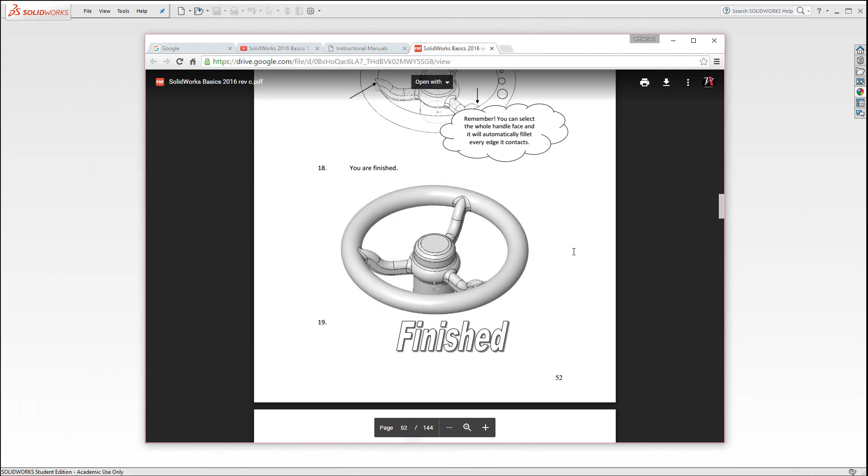This is our goal today, to create this hand wheel that you see, and we're going to step through how to create that. Some of the things we'll learn are new sketching techniques, as well as sweeps and circular patterns.

Start with a new part file. Make sure you're in IPS, for inch pound second, just down below here. Make sure that's set, and let's go to the front plane and start a sketch.

The first thing we want to construct is this block, which is 3 inches by 1 inch. Take the corner rectangle tool, glide up to the origin when it snaps orange, click, drag it out, click again, and add smart dimensions: 3 inches on this side, and on the base, set it to 1 inch.

Go to the center line tool and just draw a vertical center line above that.

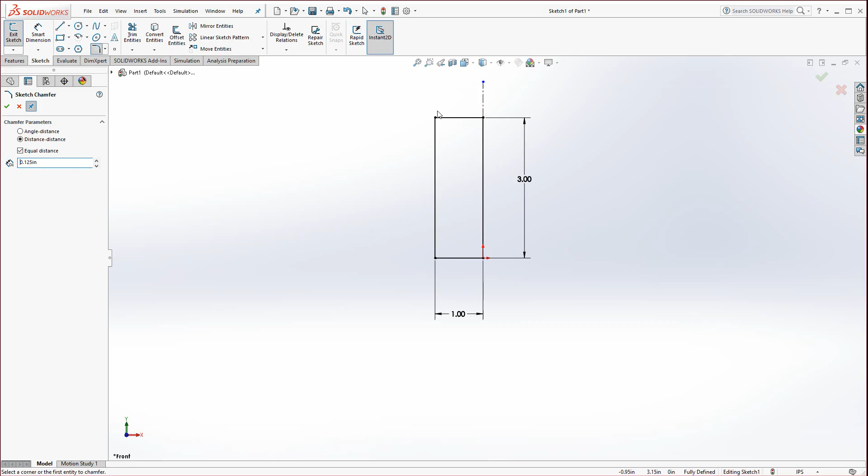Now let's take a look at the sketch chamfer tool. Click on sketch chamfer, and in this case we'll keep it at distance-distance, set it to 0.125, and click on this upper left corner. Hit the green check mark, and you'll see these dimensions up here.

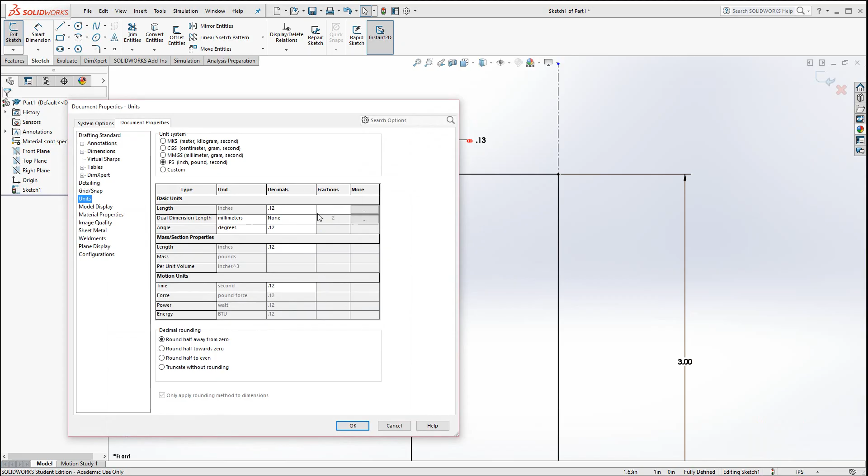Now you'll see a little red chain link, meaning the two are linked—if you change one, the other updates. Notice it's 0.13 because it rounded. So go to IPS, edit document units, and set the length units here to 0.123 to heighten the precision.

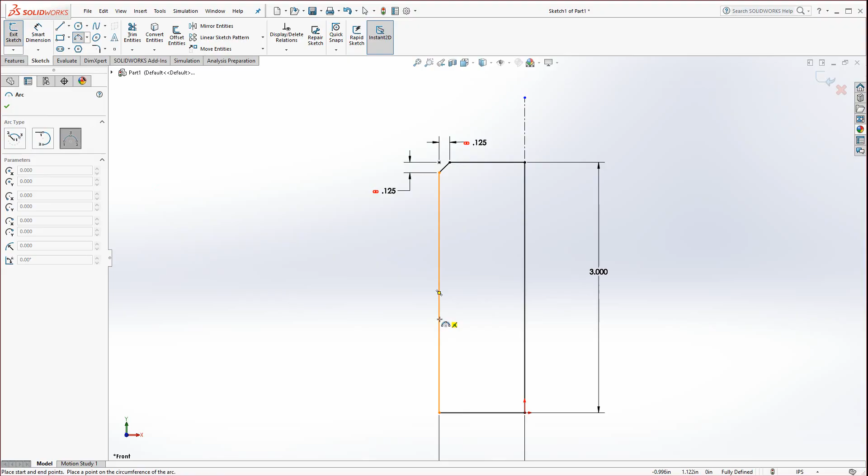The next thing we need to do is add a radius onto here. Click the little arrow to the right of the radius options and go with 3-point arc. Move your pointer up to the edge on the left side of your rectangle, get below the midpoint, about approximately where my pointer is currently, click one time, and release it.

Move your pointer up again past the midpoint, maybe around 1 inch for the length. Click, then move your pointer outward. Be very careful to keep the center point—look for the little blue center point right underneath the radius, 0.623—and keep that to the right of the line. Don't hyper-expand this or it won't collapse back in, so keep it below that, maybe make the radius around 0.6-ish.

Click, and now let's go to Smart Dimension and add a dimension to that. The dimension for that is 1/2 inch.

Now we need to also add some dimensions to locate the center of it. In this case, it's going to be 1.75 off the base, and the center point position involves a 2.5 diameter. So let's first position it off the base: click on the arc, click on the bottom line, drag this out, 1.75.

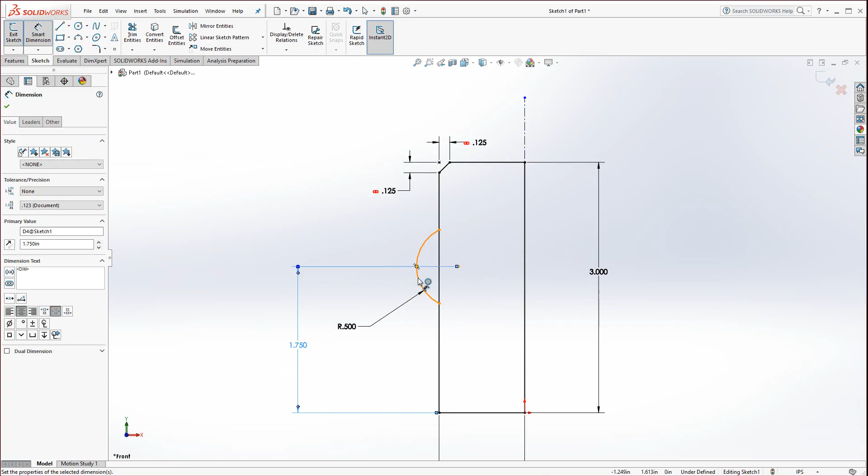Now go ahead and click on the arc, and then click on the center line that's peeking out. If you don't click on the center line, and instead click on the object line below it, you won't get this next option. Click, drag it to the right, and you'll see it gives you the diameter dimension, which we saw in exercise 2. Go ahead and click on that, and just hit the green check mark—notice it's dimensioning to the center, so whatever the dimension is, it's not what we want.

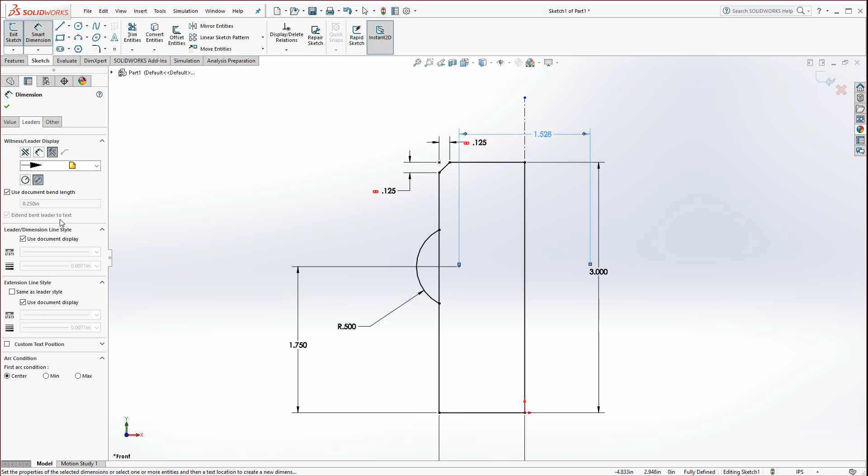So instead, go to leaders, and you'll see arc condition, first arc condition, and we want maximum. It takes it all the way around, looking at the maximum extent of that arc on both sides.

Now there's another way—usually you could click on these points and drag them out. That sometimes works, but this way is usually the best way I've found. If you don't get the arc condition or first arc condition options on the leaders tab, you probably dimensioned to the center point of the arc versus the actual arc itself. Just delete the dimension if that occurs, and retry dimensioning from the arc to the center line.

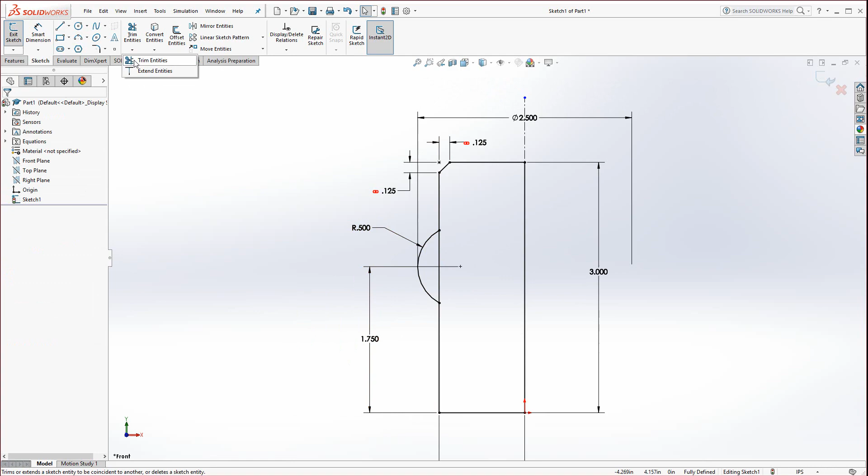Let's reposition these, and now we just need to trim this out. Make sure you go to trim entities, click on it. Notice if you hit the little arrow, there's trim and extend. Believe it or not, the trim entities does both. In this case, we're going to use trim to closest. Get your pointer on that line in between the arc, click, and it will remove it. Hit the green check mark.

Now you're free to revolve this. Let's go to Features, Revolved Boss/Base, and it should pick up on the center line without us having to select it. As long as there's one center line, it just grabs it automatically. Let it go 360 degrees around.

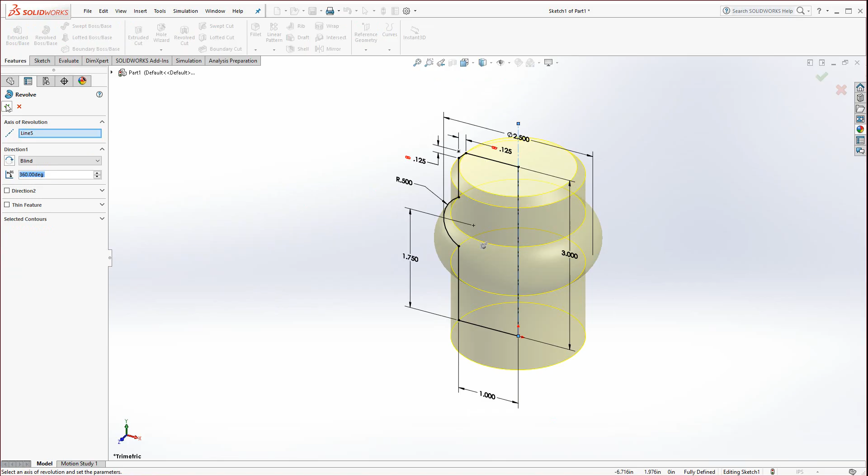Now we could go ahead and select the front plane again and start a sketch, because what we're going to do next - hit your space bar, go to front, zoom out with your scroll a little bit, and if you want, hold Control and your middle mouse button to pan to the right. We're going to construct one of the spokes.

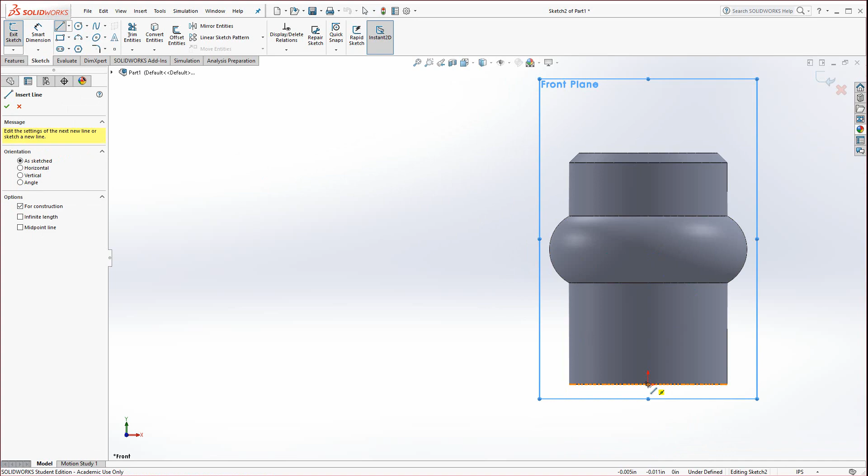So we're going to make, you might say, the skeleton of the spoke using curve. We'll go to the line and align yourself - actually, go to center line first, and click on that origin at the base because it's the center of the model. Make sure you draw a vertical center line.

Hit Escape. Now take the line tool and find somewhere on this edge, but not necessarily the midpoint. Click and drag out a 2-inch line, then hit Escape. Go ahead and smart dimension that line, just drop it up here 2 inches. Then select the line and dimension it to the bottom edge of the hub, and dimension that at 1.75.

That should center it for us on that radial area. Now let's go to the arc tools - in this case, find tangent arc. Click on this point, drag it to the left and up. It should be less than 90 degrees, so 70 or 80 degrees is good, and the radius about a half inch is fine. Click, and now you'll see you could drag off an additional tangent arc, and if you can, infer to it and get this center directly above, or below, the end of the arc. That's great. If not, don't worry about it. Click, then hit Escape.

Now go to the line tool and draw a line from this end, just extend it out. Now what we need is a tangent relationship between here. I'm going to hold Control and select all these just to show you - you need to see tangency, tangency, tangency. That's what those little symbols indicate. If you don't see tangency, hit Escape a couple times and hold Control, and select both the line and the arc that you want to make tangent. Then on the left you should see tangent. If you don't see tangent, hit Escape a couple times and try it again.

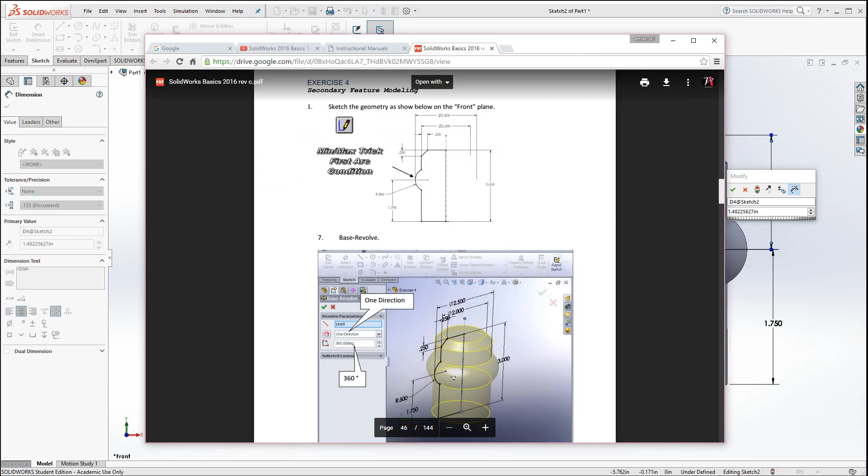Now we could go ahead and add a few more dimensions here. Let's dimension from this line to this line and drag this to the right, and let's take a look at the print - that's 1 inch. And finally select this point to this line, just get it up here, and that's going to be 5 inches.

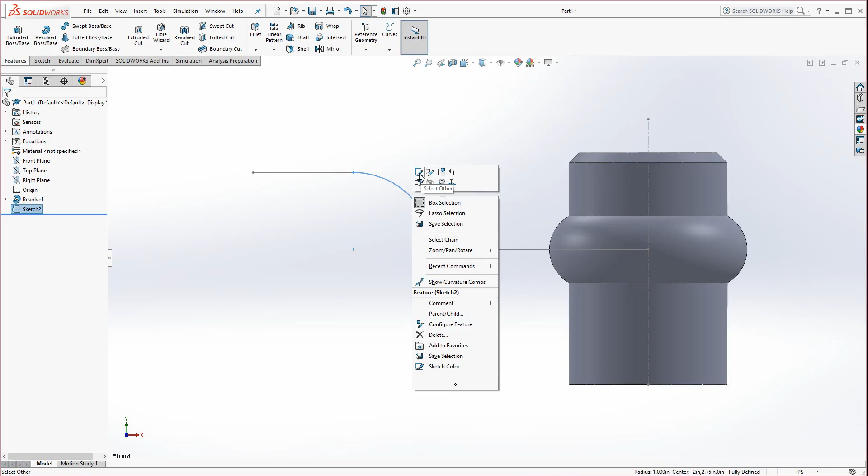Now hit the rebuild button, and the rebuild button regenerates the model. Any changes will update that might have occurred, and it also exits you out of the sketch. So you've got to be careful in some cases - you don't always want to rebuild while you're editing a sketch. But if you do hit rebuild, notice it turns gray. You could always double click on it to bring it back, or right click and find edit sketch.

Different ways of getting back in, but I'm just going to double click on it because I think I actually put in the wrong dimension here. Let me go back to the drawing. I did - it was supposed to be 4 inches. So I'm going to double click on the dimension, type in 4, and hit enter. And now I could hit rebuild again.

All right, now we're going to build the profile at the end here. We want to create a plane. There are several ways you could do this, but this is just one way. Go ahead and select the endpoint where the plane is going to rest, then hold Control down and click on the line that's attached to that endpoint.

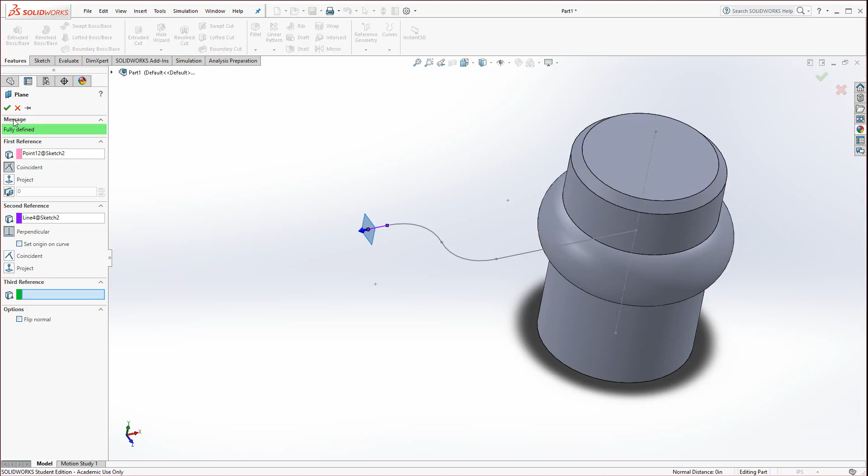Click, and I'm holding Control, so you have to select the endpoint and the line it's attached to. When you go to Reference Geometry and Plane, it will automatically create a plane perpendicular to that point and that line. So that's one of many ways to create a plane. Go ahead and hit the green check mark. These are not really boundaries, it's just a visual aid, so you can enlarge or make it smaller.

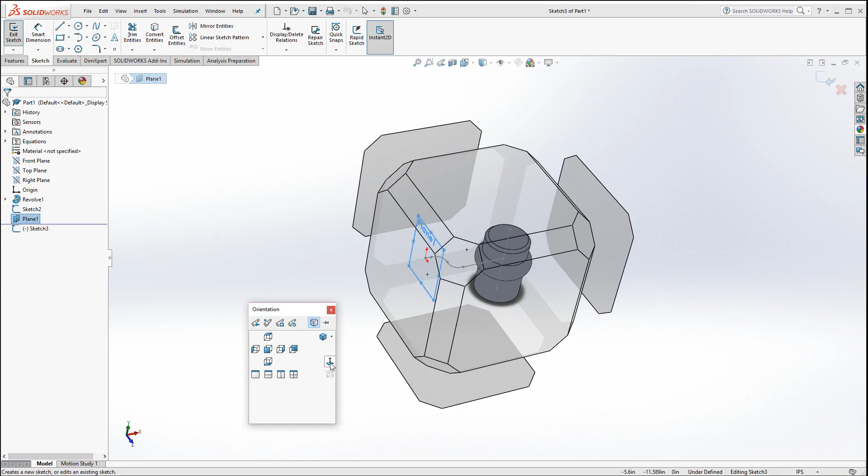Now go ahead and select that edge of that plane and click on Sketch. Hit your space bar, and here's where you could go normal to. If it's rotated incorrectly, remember the Alt keys - you could rotate with Alt and the arrow keys, left or right, to go clockwise or counterclockwise. Just make sure it's vertical as you see here.

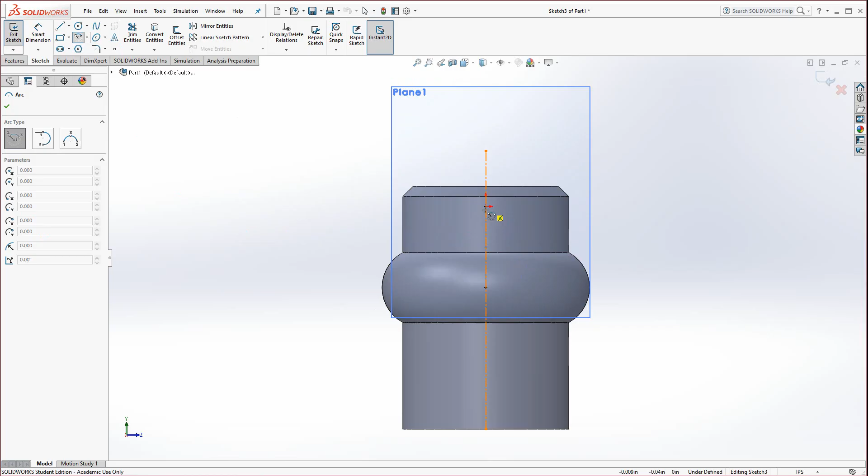Now I'm going to go ahead and take the center point arc tool. This is the toughest of all the arc tools, of the three I should say. Move your pointer right here, get on the origin, click, and drag out a radius about a half inch - so not quite a half inch actually, keep it below a half inch.

Notice I'm horizontal. Click, drag up, and if you get an opening instead of an arc, a small little arc, go back down around and then go back up again - I'm just moving, not clicking on anything. Now rotate it around till it snaps horizontal to the other side. Click, and now take the line tool, and off of this point drag down a short little line about a half inch. Click, drag it across until it infers, click, and connect it to close the line.

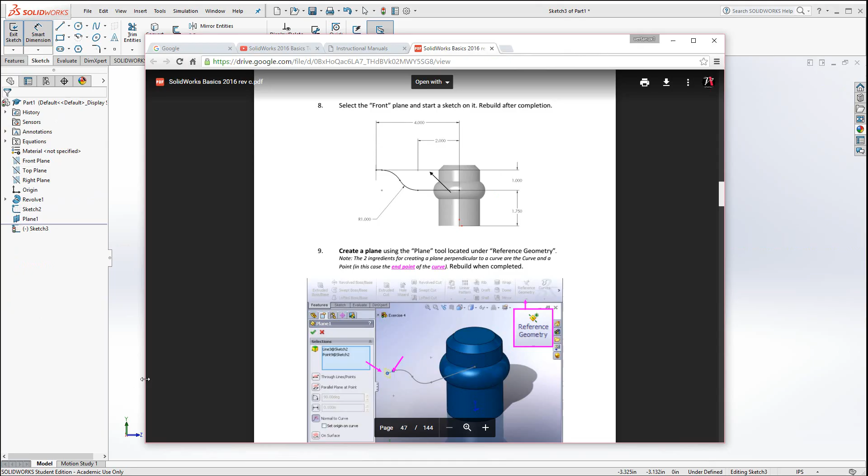Now let's go to Smart Dimension, and let's put the dimensions in according to the drawing. So in this case, 0.75, 0.5. So click down here and drop it below 0.5.

Now here's what you see occurring - even though I drew that, it did not capture tangency automatically, and that happens sometimes. Sometimes you get lucky and you could get it depending upon how you're drawing and what you're drawing. In this case it was not successful. So I'm going to leave the dimension there. Don't panic about it, just hit Escape if this happens to you.

Now hold Control and select the line and the arc that you want to make tangent. Release Control, and you could go ahead and click on Tangent. Now notice how it snaps back. Okay, the next dimension is 0.75 from top to bottom.

Click on the bottom line and click on the actual arc, not the center point of the arc. If you do that, you will limit yourself to this dimension right here. Just don't put it in dimension just yet.

Just hit the green check mark. What we can do now is grab that little blue square and drag it up. In this case it's snapped, and this is what I mean by sometimes it's a little quirky. This is where you use the leaders tool and go to max. Yours might work—sometimes I've seen where it works, other times it doesn't, depending upon what's behind it most likely.

And in this case, now this needs to be 0.75. Okay, hit escape. One other thing that I didn't capture apparently because the center line was behind there was I didn't lock it in. Notice how it's blue. Now if yours is completely black, that's an indication it's fully defined.

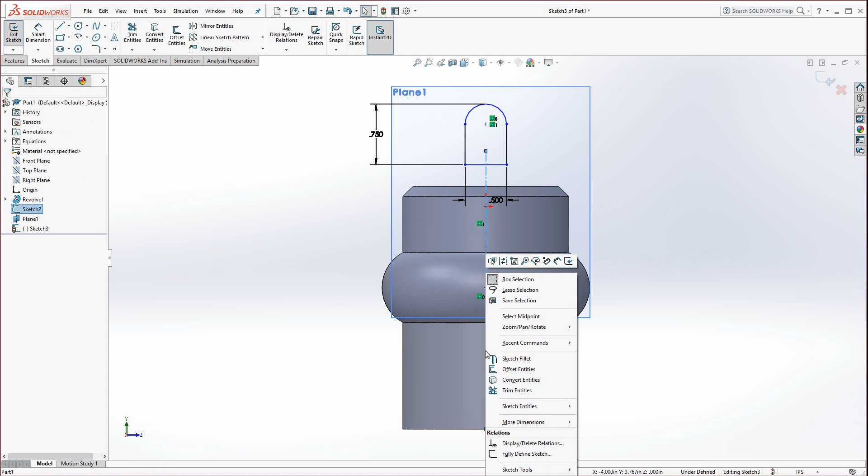So I better hide that center line. Right click, and we want to find the hide. Actually, I'll have to hit escape. Let's see if we could do this here. Okay. Click on hide, the little eyeball there. All right, now we should be able to drag this down, and maybe not.

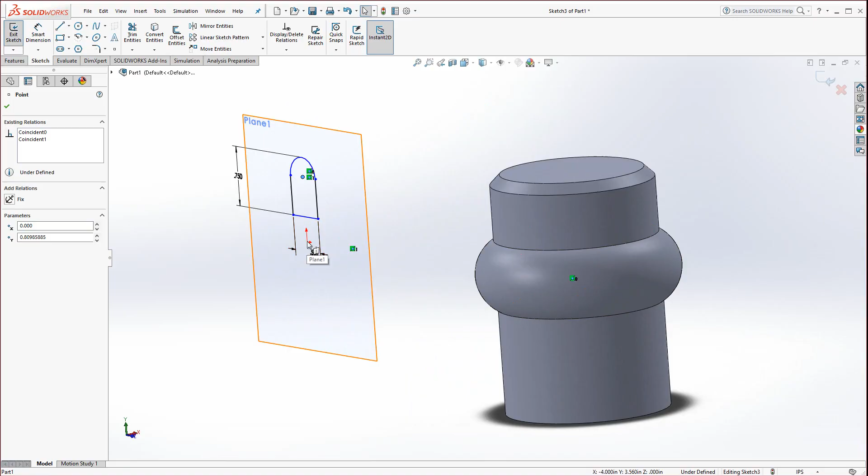I'm going to hold Control. Let's see what we got going here. Okay, apparently we're having a little bit of a rough time on that one. Let's go normal to. Next time I'm just going to hide that sketch behind it so I don't run into this issue.

Okay, actually I'm going to go back and unhide that. So I'm going to show it. And let's see if we could get it at an angle here. I'm going to select that, and hold Control and select this. Go with coincident, and now it locks in. Go ahead and hit the green check mark.

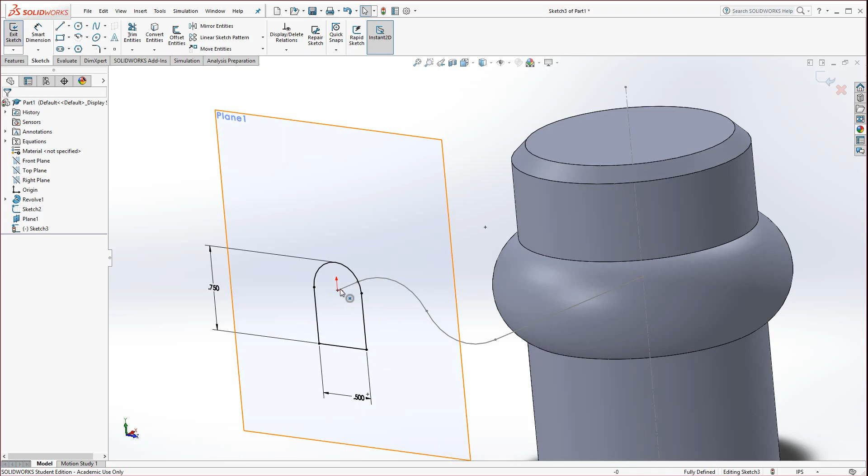So I think part of the issue is if the center line might be there, but just go to like an isometric view and you could lock those points in to that sketch. All right, now that we have that completed, hit the rebuild button. And let's hide this plane. Just get on the edge of the plane, right click, and click on the little eyeball.

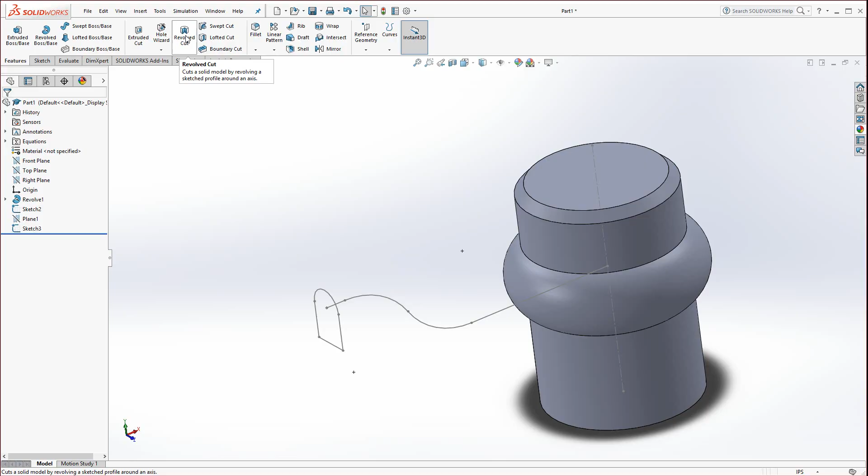Now we're ready to sweep this. Let's go to this swept boss. Click on it. Select what looks like a tombstone, and then select any curve on this spline. And you can right click or hit the green check mark up here.

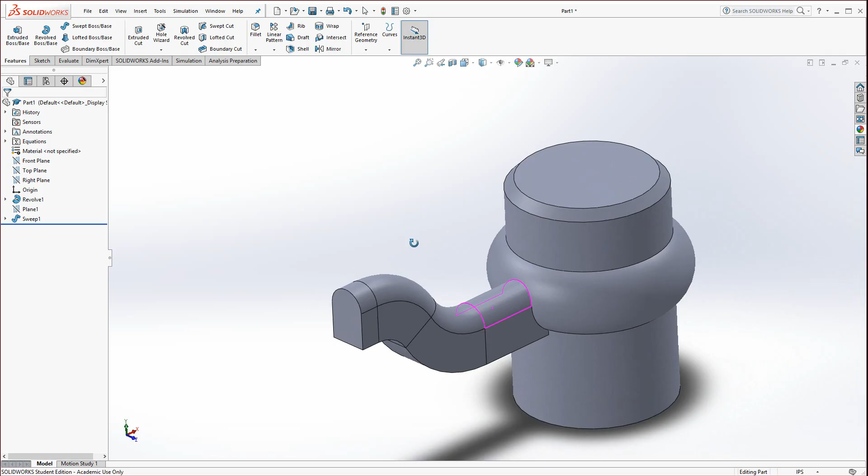And now we could actually hide that sketch. If you right click, go to the eyeball to hide it. Okay, let's put some fillets on there. Go to the fillet tool, set it to 0.25, and select this edge here.

Actually deselect it. Click on it again. We actually want 0.188 fillets, and that's going to be on this underside edge here and this edge here. Could we have added them into the sketch as sketch fillets? Absolutely, that would have been actually more efficient. This is okay though. Just hit the green check mark.

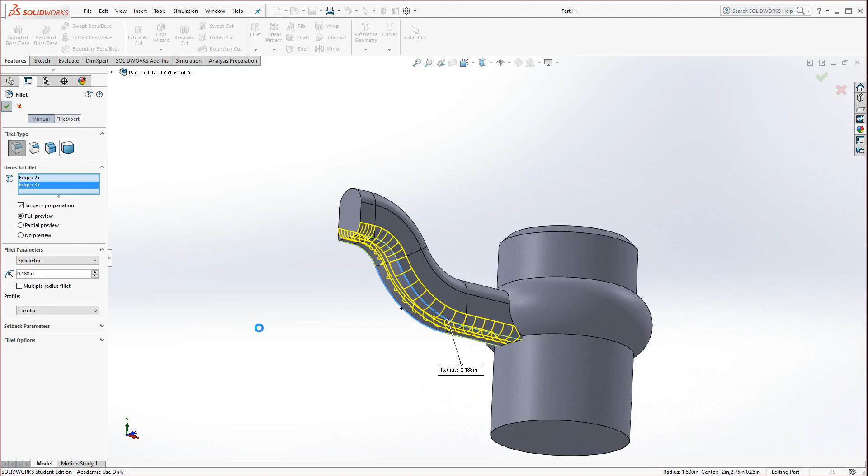Go to the fillet tool, and now set it to 0.25. And now we could go ahead and select that edge and fillet it around.

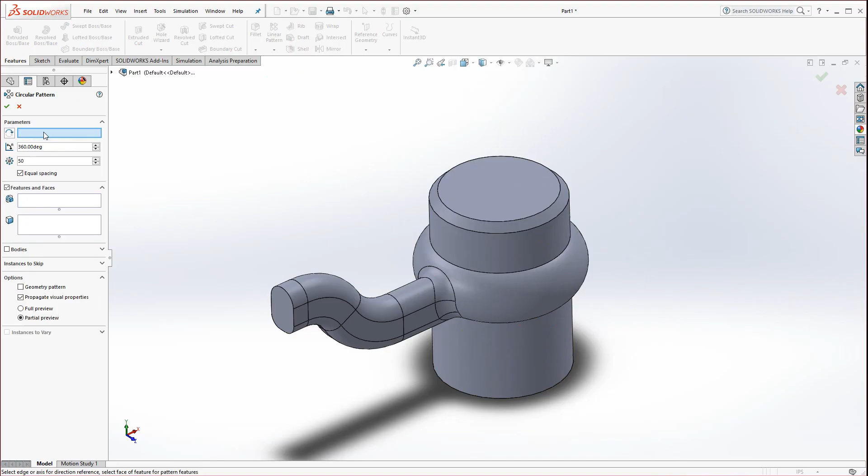Okay, the next thing we're going to do is we're going to pattern that. So go underneath the linear pattern tool, there's a little arrow, go to circular pattern. First of all, click up here for the pattern axis. We'll start at the top and work our way down. Click on this cylinder or any of the cylinders except this one—the radial cylinders where there's fillets and things, it doesn't usually like that.

Now over here we just need 3 spokes total. That includes the one that's there. So now go ahead and click on the features here, and let's select the spoke. Now it looks like you got a good preview going here, but be aware it's missing a couple things. It's missing the fillets, so make sure that you select the fillets as well. You can do this also up here.

Sometimes the fillets might be small or features are very small and difficult to select. Hit the little arrow there and it will drop down, and you could select the fillets from the feature tree or any other features you might want to carry along. Hit the green check mark to apply.

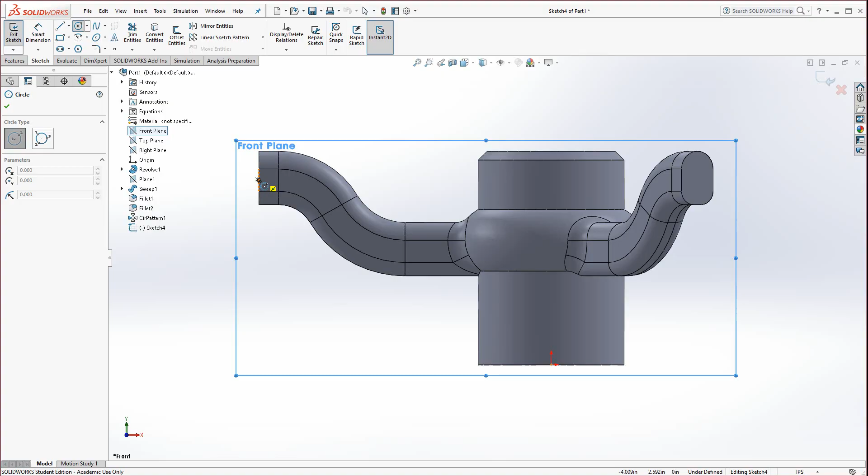Now let's go to the front plane again to finish this up. Select sketch, hit spacebar, and go to Normal To. Now let's go to the circle tool. If you left your other plane up, the plane 1 we created earlier, you won't be able to capture this midpoint, and you'll have to use the dimensions in the book. But if you capture this midpoint, you don't need those dimensions. Click and drag out, draw a circle, and dimension it at 1 inch for the hand wheel.

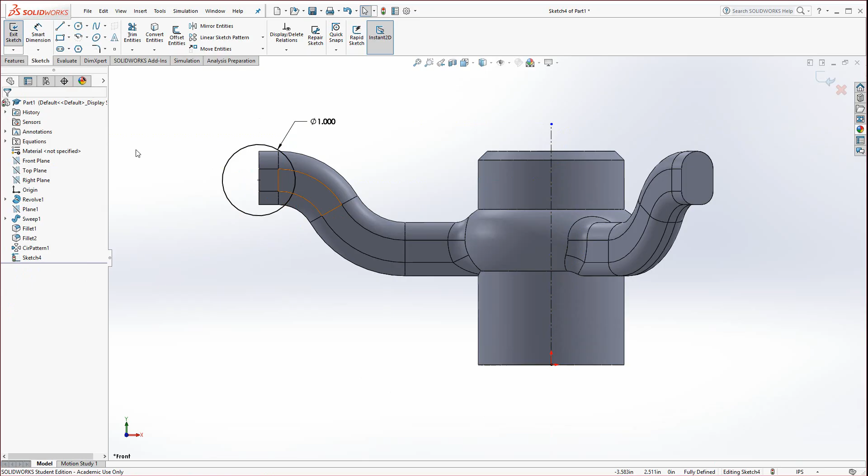It should turn fully defined because it's centered on that edge. Now what you're going to need is a center line. You can reuse the center lines from the other sketches by showing them, or turn on axes, but it's just easier to draw a new center line. Go to Features, Revolved Boss/Base, and there we have it.

Now go back to the Fillet tool. It should still be set to 0.25. Select this face — other CAD systems make you select all these edges, but you just have to select the face and everything gets filleted. Hit the green check mark.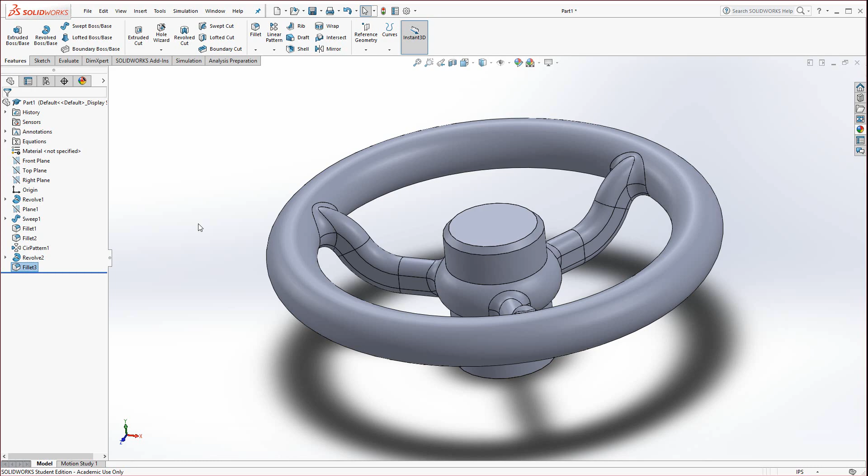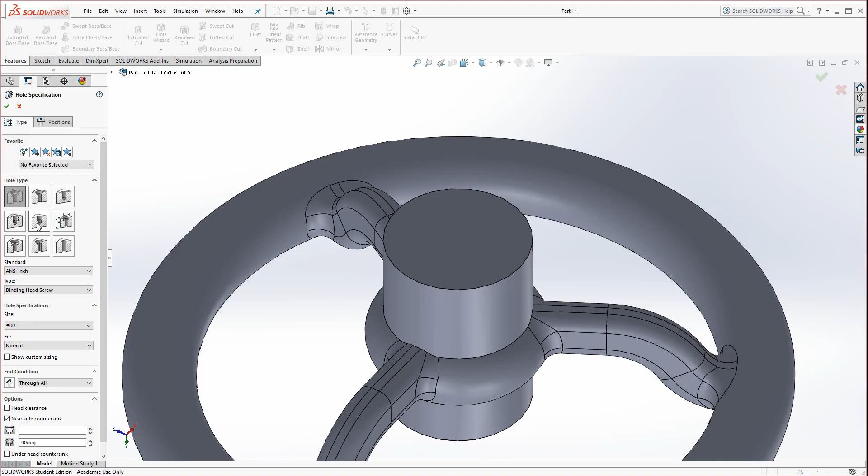Okay, rotate this around, we're going to take a look. This isn't the best application to show this in, but the Hole Wizard — which I haven't shown anyone until this exercise here, exercise 4 — is a wonderful tool. If you click on Hole Wizard, you get to pick the type: counterbores, countersinks, standard tapered holes for national pipe threads. You can even make custom holes.

You see them all there. Let's go with the counterbore, and under ANSI inch here we'll stick with that, but notice there's all the different formats — binding head screw, all types of hex screws, hex finish bolts. Be aware, whatever you select here, later on in assemblies you could propagate those particular binding head screws, and things will all automatically be identified using Toolbox, if you have Toolbox, which has all these standard nuts, bolts, washers, and things like that.

Okay, the hole specification — let's go with a number. We'll actually go with a 1/4 inch. You'll notice the fit, you could specify close, normal, or loose. Also, if you wanted to go through all — in this case we want to go blind, and then specify 1 inch in depth. And then these are some additional settings if you want to change those.

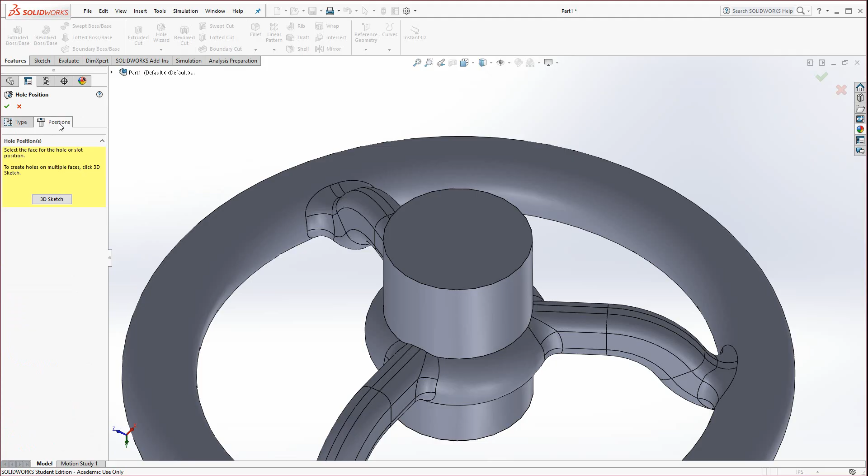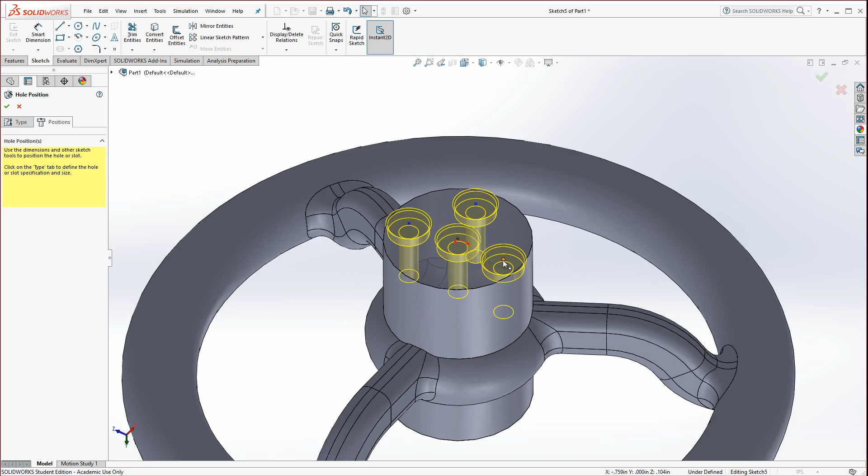Now you click on the Positions tab, and you could go ahead and select this face. You'll notice you could actually capture the center — click, drop one in. You could also add additional ones just by clicking wherever you want additional holes. I'm going to right click to go to select, and then you could click on those and delete them, or move them. Those points can be deleted, and they could be positioned too using dimensions — go to the Smart Dimension tool and locate them. We just want the one that's right here. So go ahead and hit the green check, and now you have your Hole Wizard mastered.

Okay, just make sure you save that as capital E4 for exercise 4. That concludes the actual exercise. Now there's some labs that go along with it. Feel free to pause the video and maybe watch the labs after you give them a try on your own. Otherwise, you could go ahead and watch the videos if you wish.

Okay, in the manual we have Lab 4. Lab 4 is a very difficult part, a great challenge. So what I'm going to do is step through how to create this. Let's take a look at some of the basic dimensions. Always look at the outside, ignore the inside at first — look at the big picture. We have a 1/2 inch thick part, it's thin walled, you can see it's shelled out, typical wall 60 thousandths. It has a radius of 0.75 at the bottom, a radius of 1.5 at the top, and a couple angles here — one that darts out 24 degrees from end to end, and one that's 115 degrees from end to end. So let's give that a try here.

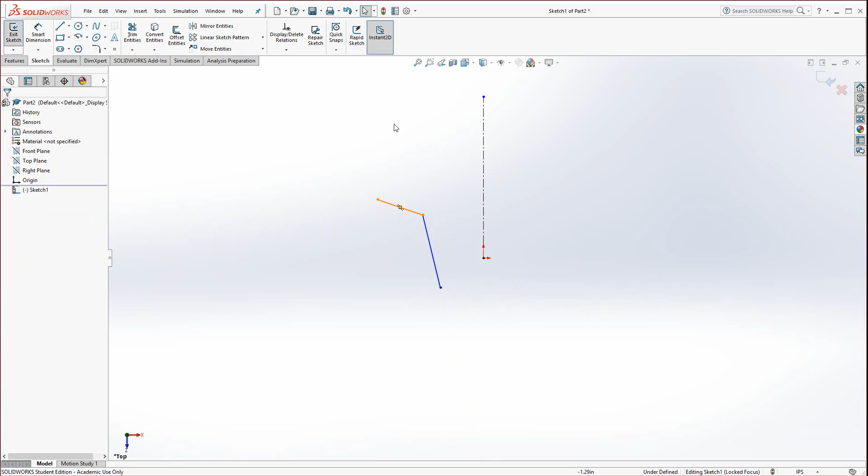Now click and drag a fence to surround the two. Go to the mirror entities, and it should mirror it over to the other side immediately.

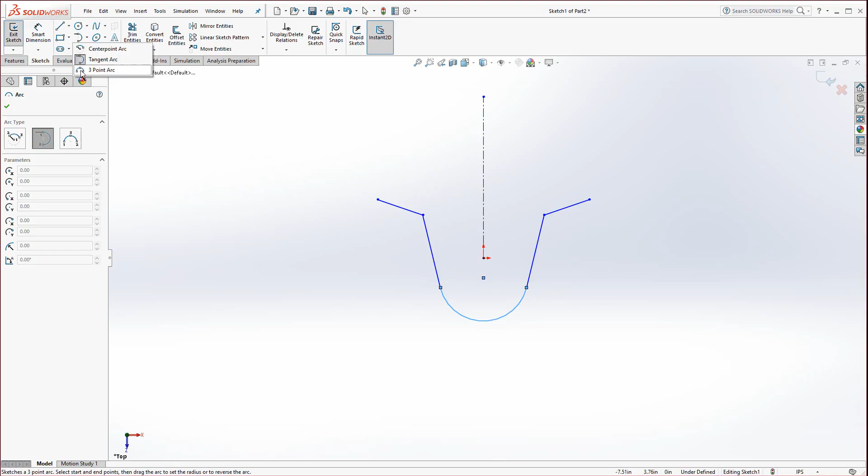The bottom arc is a tangent arc. You can tell because it's smooth in the dimensions that are given. The top arc is not tangent, so you're going to want to use 3-point or center point arc. I'll use 3-point because I could just click and go across, click, and drag it out.

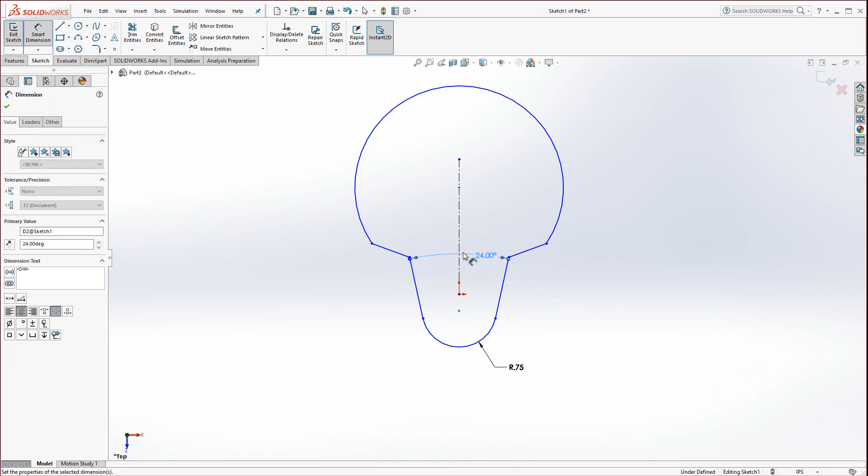Hit escape a couple times. Let's add the dimensions. So the smart dimension at the bottom was 0.75. The angle between these two lines was 24 degrees, and the angle between these two is 115. And then this arc is 1.5.

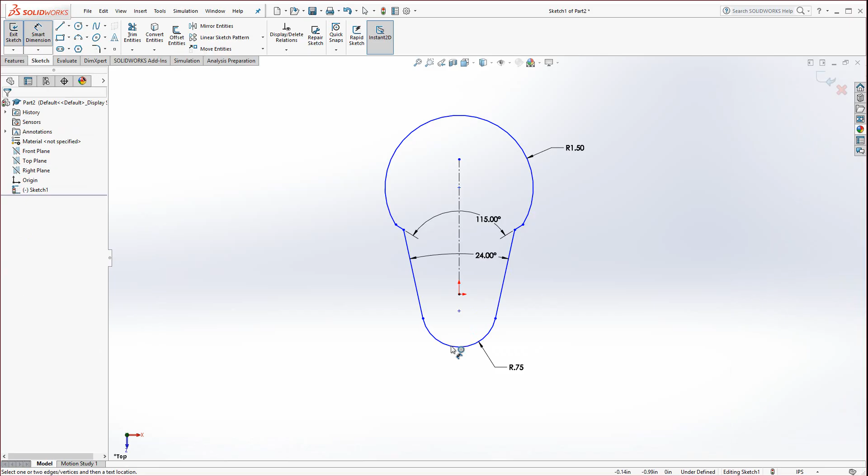Now we need to position it. So the dimension between the two arcs is 1.25. And now it's starting to look closer to what it should. Hit escape, and let's drag this to the origin.

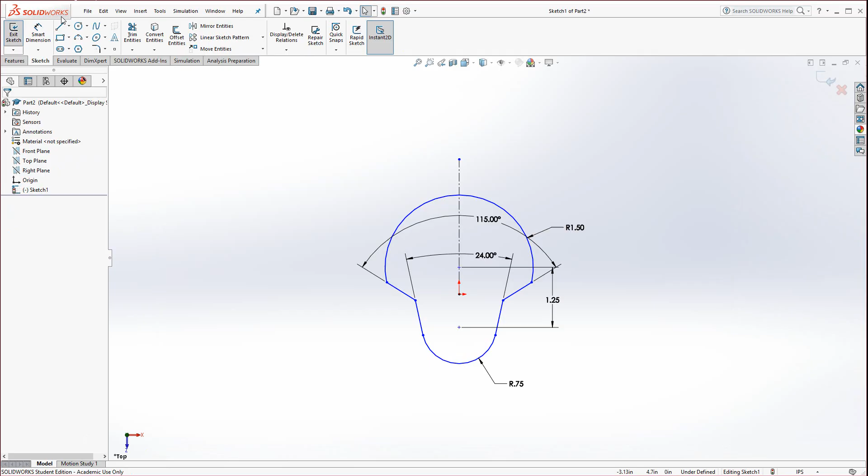In this case, actually, there's one more dimension we're missing. It's not dragging. It's this 1-inch dimension from the corner to the center of the base arc. So click on the bottom arc and this little corner, and that needs to be 1 inch. Now we could drag this, snap it to that center.

Go ahead and extrude this, and it gets extruded 0.5, but there is draft, so don't forget the draft. And according to this print, our typical draft here is 25 degrees. So click on draft, 25, hit enter, and the green check.

Okay, you have the base completed. Now put the fillets and chamfers on. Then you could shell it. So in this case, we have a chamfer of 30 degrees by 0.181, and then a radius of a half inch. So let's put the radius on.

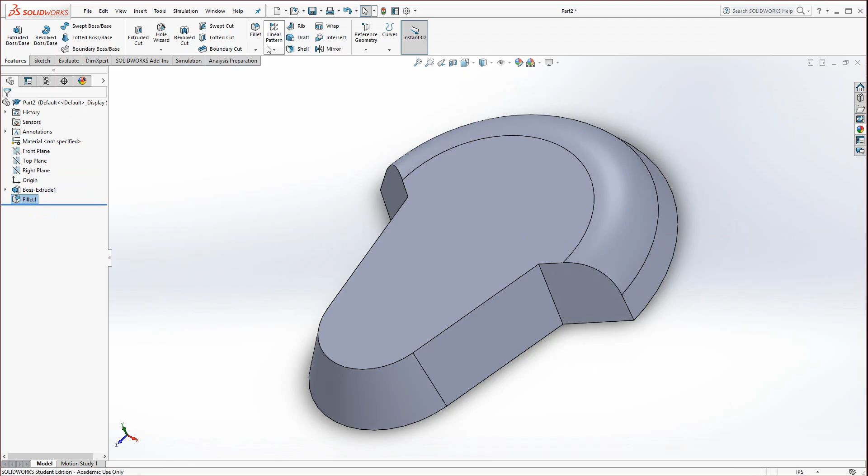Radiuses are always easy. So 0.5, select this edge, and hit apply. Now go to the chamfer, and it's 0.181, and then it's 30 degrees. And select this edge and hit the green check.

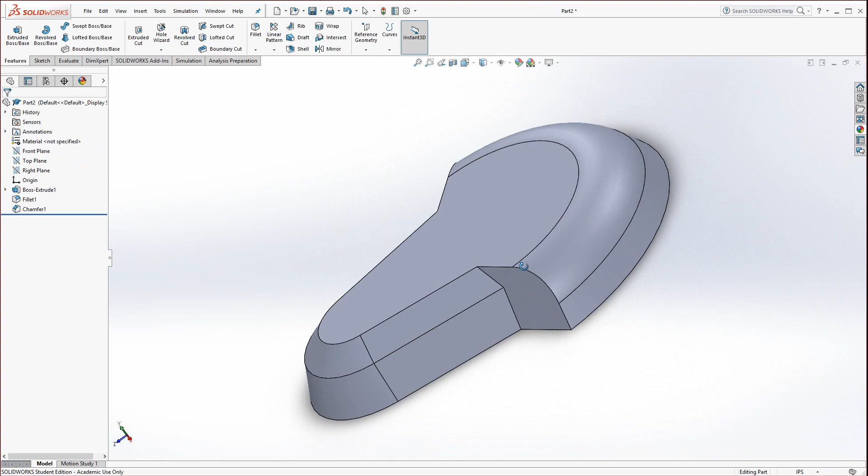There. Now we could shell this. Flip it around the back, and the shell is 0.06 typical. So select this back face and hit the green check. Rotate it around now, and let's get the details on here.

Select this face, start a sketch, and go normal to. And we'll draw in one of those, looks like a petal for a flower. Take the centerline tool again, and at the origin, we could use this.

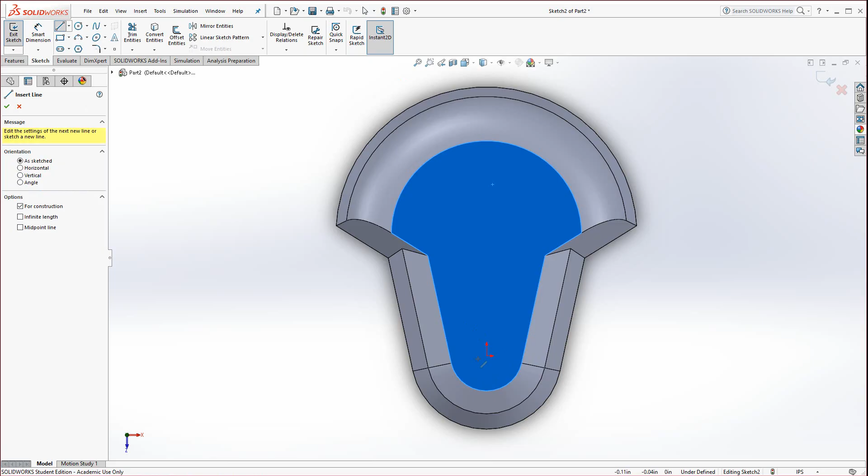Oops, I didn't lock in before I selected that. Make sure you get the orange dot before you do that. Draw that in. I accidentally drew an object line, so I'm going to click on it and select construction geometry.

Now I could go back to the line tool, draw a little angled line just like that, and then if we click and drag from right to left, it'll select both entities even though the centerline was not completely in the envelope, and hit mirror entities. Now go to tangent arc and cap off the bottom and the top.

And now let's take a look at those dimensions there. Hit escape a couple times. For that, the bottom radius looks like it's 0.1 and the top is 0.2 and the distance between is 0.5. So bottom 0.1, the top 0.2, and from centers 0.5.

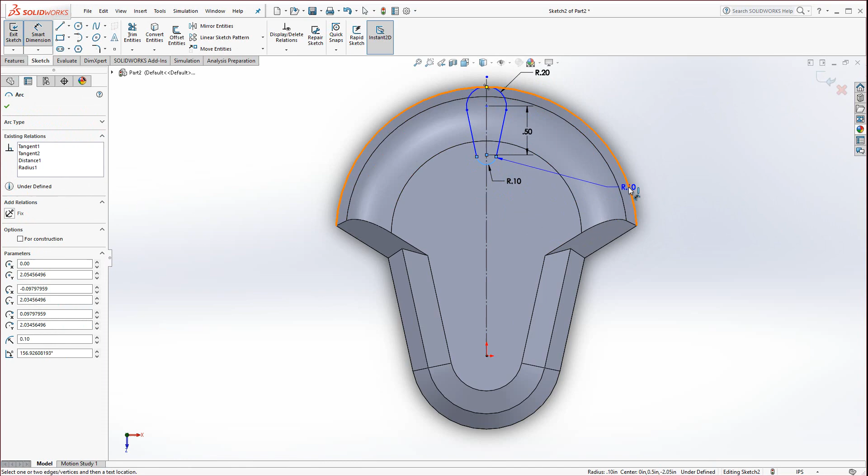Now we have to locate this. Go ahead and select the bottom arc and select this top arc and it will dimension to the center. Click to drop that. And this I think is 0.7.

If we take a look at the print just to verify that. And it's a bolt radius there, 0.7. That's correct. Okay, let's go to Features and Extrude Cut through all.

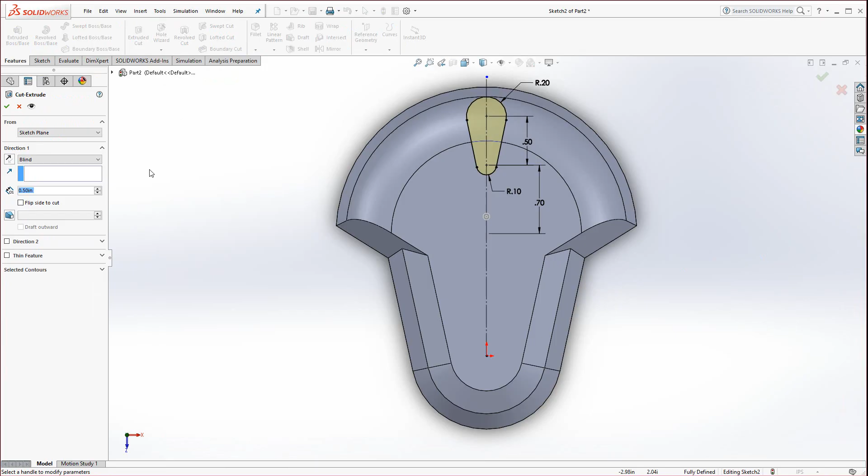All right, now that we have that, we want to pattern it. So go to Circular Pattern.

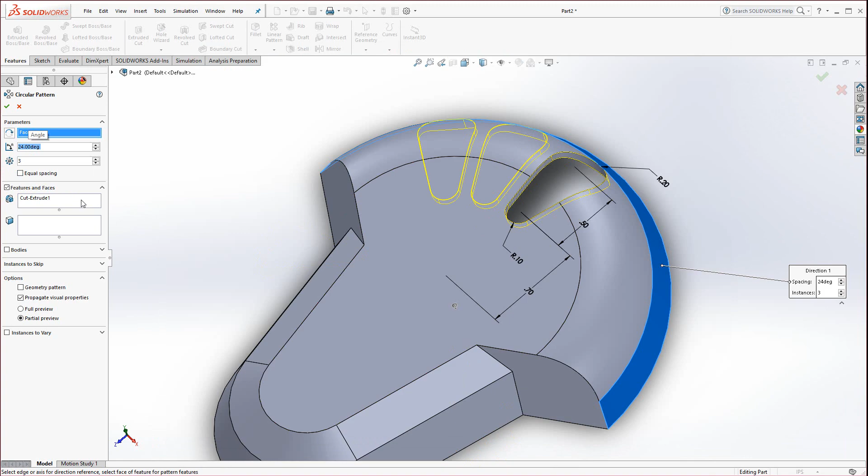For the feature to pattern, select this face, then click over here and select this outer edge. We can see it's appearing like that. Now, because we don't want to go all the way around, we're going to do half. They're 24 degrees apart, so if we specify 24 degrees and turn off equal spacing with 3 instances, there we go, we have half.

That's a circular pattern just for a little segment. Now let's use the mirror tool. Click on mirror. For the mirror plane, if you hit this little arrow, technically if you drew this correctly, your right plane should be dead center. You'll see it picked up the feature to mirror because those were the last selected entities. If they don't show up in preview, make sure you select the circular pattern one.

So it's in there, and hit the green check. Let's select this face now and start a sketch, go normal to. Locate the center by moving to the edge, there's a center point. Click and drag out a circle. This needs to be set at 0.835. Let's go to Smart Dimension.

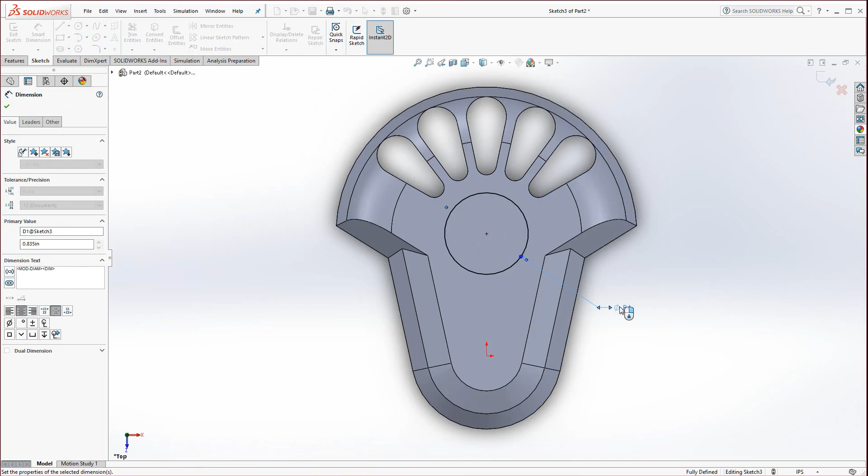And that gets extruded 0.03 in height, so let me just verify that. Yeah, 0.03, and there's a 0.03 radius on it. So hit Apply and go to Fillet.

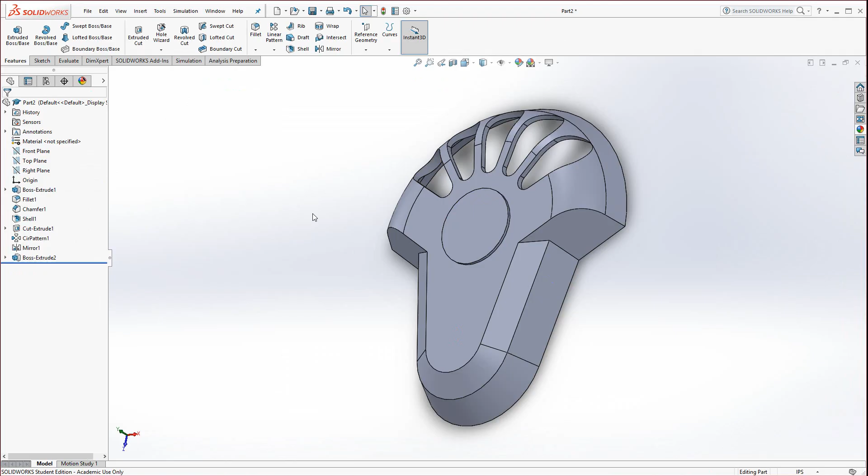Actually, I'm not going to fillet just yet, we need to put a little cutout in there. So I'm going to select this face and start a sketch, go normal to again, and zoom up to it. Select the center rectangle and get it right on the quadrant right here, see the little orange dot? Click and drag out a rectangle.

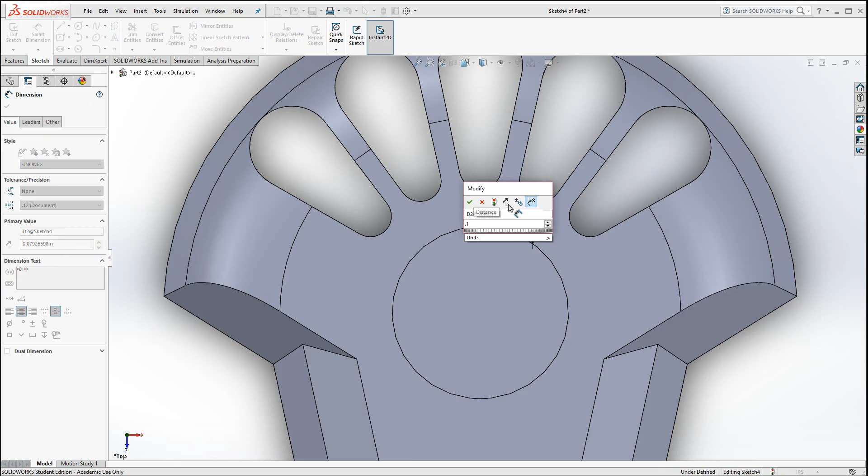Smart dimension it at 0.1, and then dimension this at 0.1, I believe, and that might be a little bit, I think it's 0.05. Let's take a look at the print. And here we can actually see it's 0.05 on this back view. Now that gets cut through, and then there's some radiuses of 0.1 radius that go in there, and then it gets patterned.

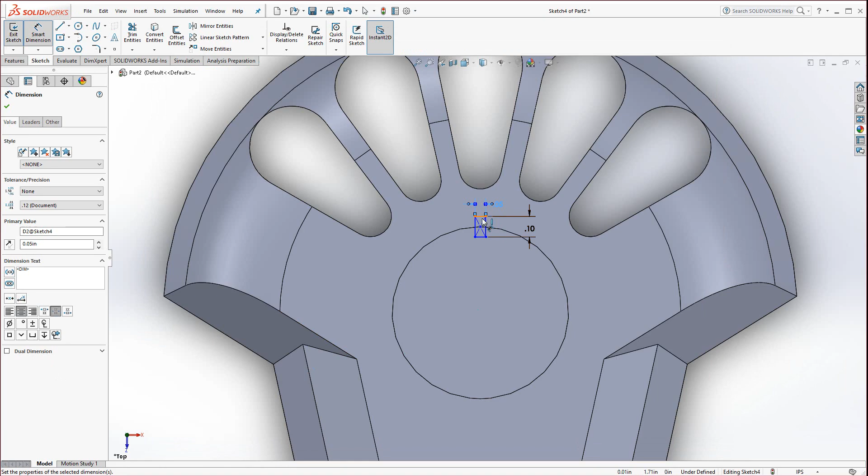So we need to make sure those are locked in. Control select this and the origin, make sure they're vertical to one another so it turns fully defined. Now I go to Features, Extruded Cut, select through all.

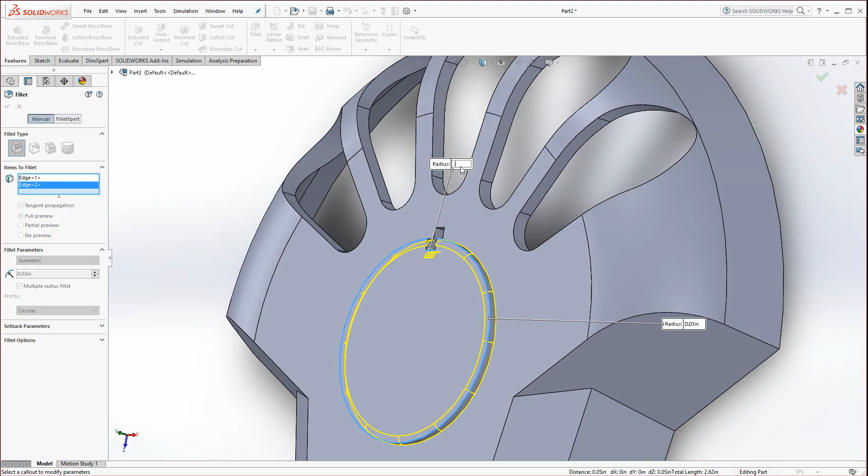And now while that's still selected, actually not yet, we're going to first put our fillet in. Let's go to the fillet here, and we'll set 0.03, select this edge, then go to multiple radius fillet, select this edge, and set this one to 0.1, and hit the green check.

Now we should be able to just pattern that. Let's go to the circular pattern tool, and we're going to select equal spacing, I think it's 15, but I'll have to double check that. I'm going to click on this, and we could just select this outer face again, and the features to pattern, select this face, select that fillet, and we see our little preview. We could double check by counting those, I don't know if I have them called out on the print.

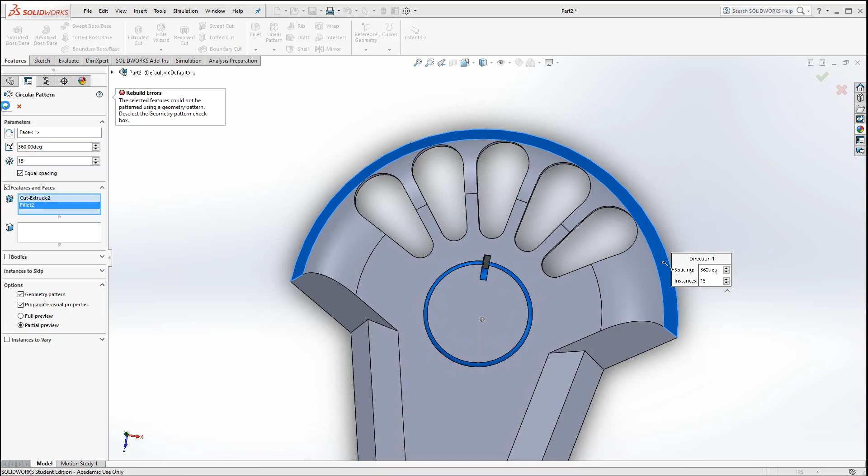And we get a rebuild error, most likely due to the fillet. I combined the two fillets, which I've never done before in this particular instance. So let's try geometry pattern, perhaps that will fix it. Geometry pattern didn't even fix it.

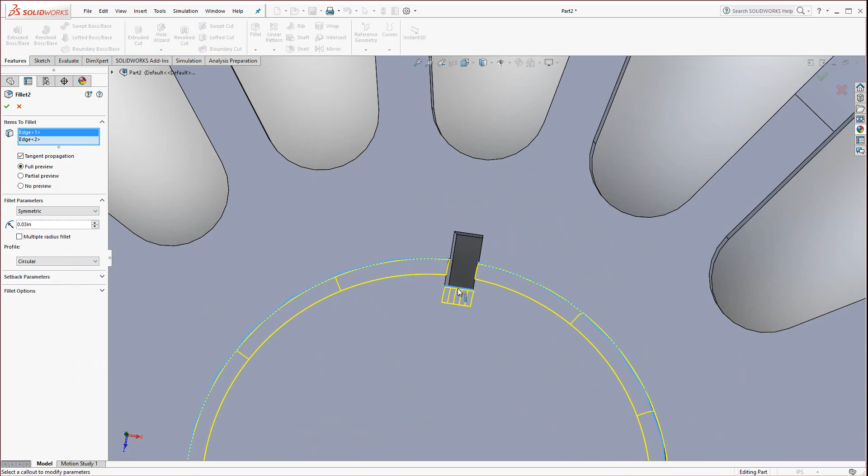So let's cancel out and edit that fillet. Edit feature, and let's turn off multiple radius fillet, and deselect that inner edge here. We'll keep these two separate. So if I click on that inner edge, it's gone.

Now we could put in a separate fillet, select the edge, go to fillet, and this one will be 0.1. Thus we remove the two from being into one, we actually make two separate ones.

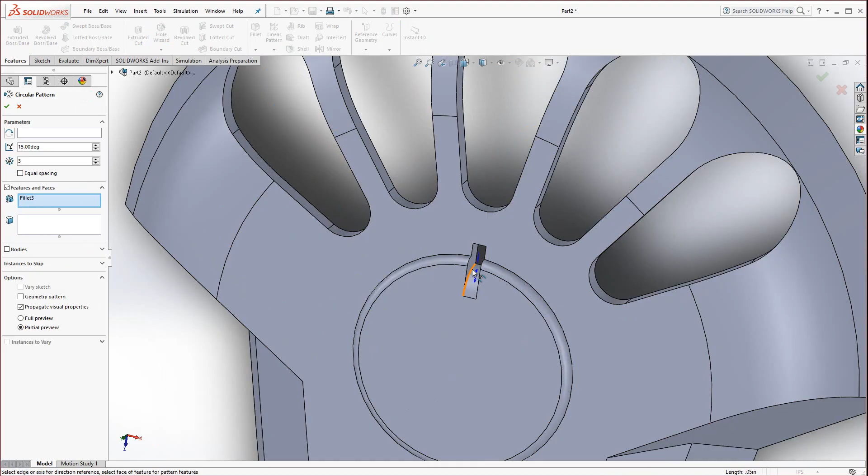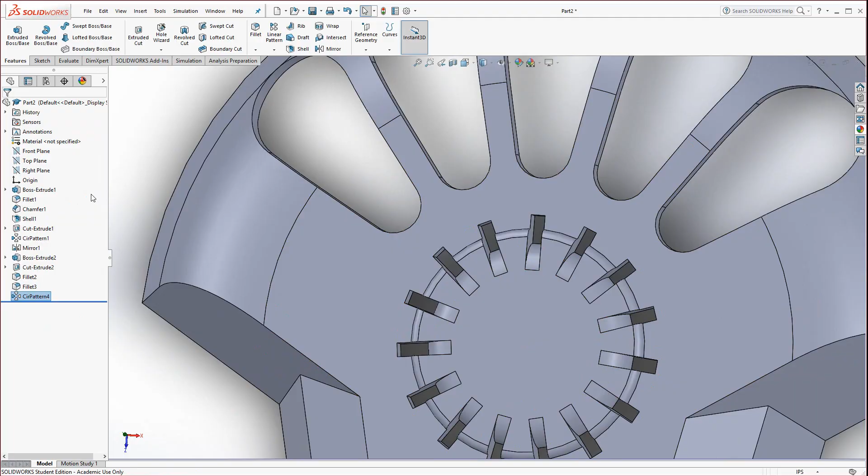Now we could go back to circular pattern, and you can see the fillet selected. We'll also click in this little face here, then we'll select this, and we can select this edge. Make sure equal spacing is on, and bump it up to, I think, 15. Looks good, hit the green check. And there, separating the two allowed it to work.

Now, I have a picture of a little logo in the center there. I don't have the dimensions on the print for you, but I will give them to you right now. Make this 0.4.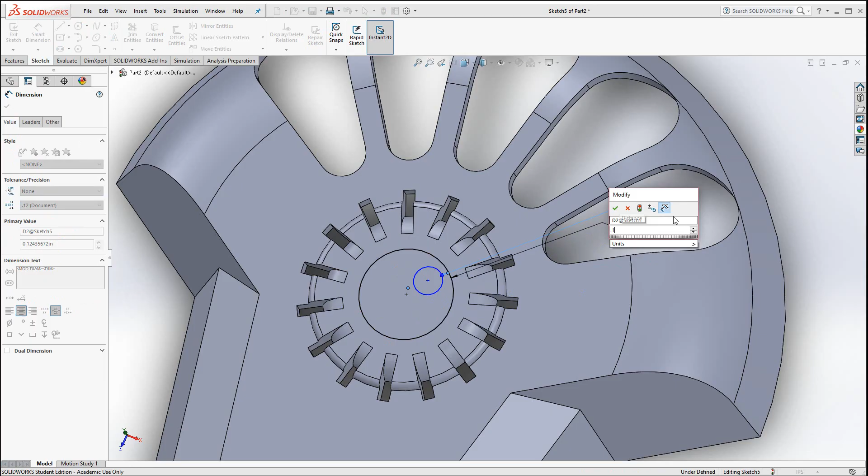And then add a circle, just offset. This is only if you want to do this, it's like a moon over the sun. Dimension that at 0.125, and then you could locate it from center to center.

Cancel, that's not the dimension I wanted to get. Let's go normal to, and we just want vertical and horizontal. So select from here to here, drag that out, we'll make that 0.0875.

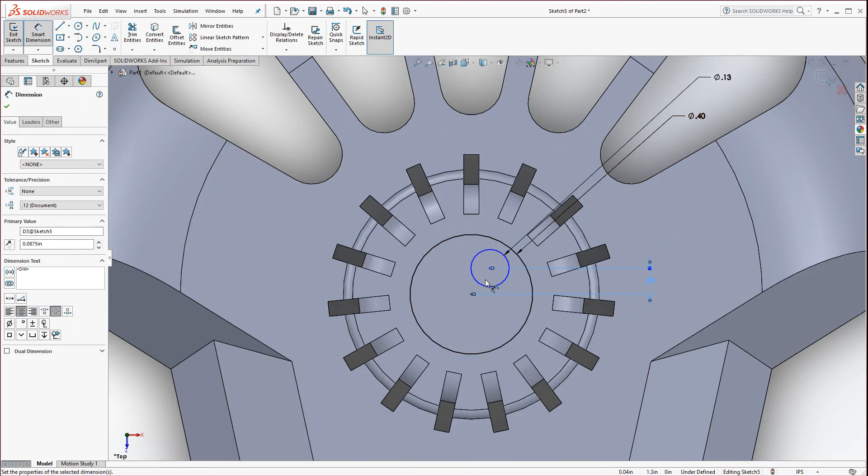And then dimension from here to here, drag it straight up, and that's going to be 0.06. Now we could just go to features, extrude cut, and it's just a very shallow cut, 0.01.

All right, rotate it around. Let's get the inside, select this face, start a sketch, go normal to, and draw 2 concentric circles in the center, and dimension them. One is 0.6 and one is 0.5. Go ahead and extrude those.

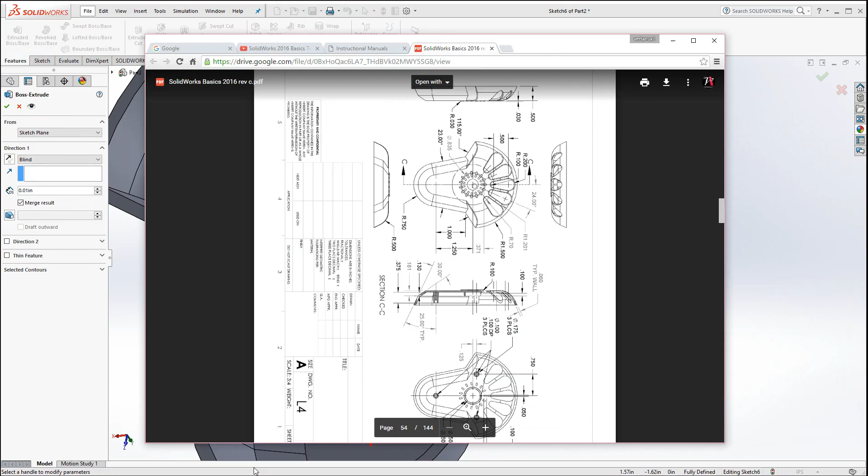And if we look at the print, the extrusion height is 0.13.

Hit the green check. There is a little cut on there, so select this face and start a sketch. Go normal to.

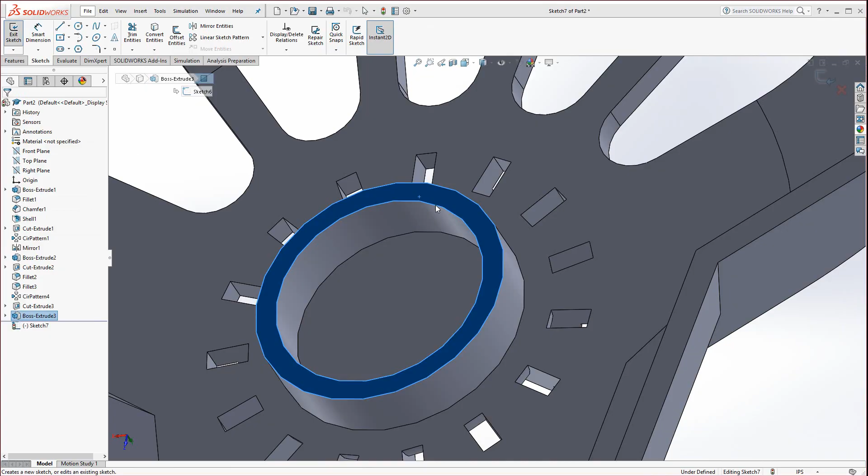Use the center rectangle, drag out a little shape there and dimension it. Oops, didn't want that. Stay away from that midpoint. 0.05.

And then it's just centered. You could add relations or dimensions, but I'm just going to cut it. Extrude cut. The depth for that particular cut, you can see on the section view, which is 0.1.

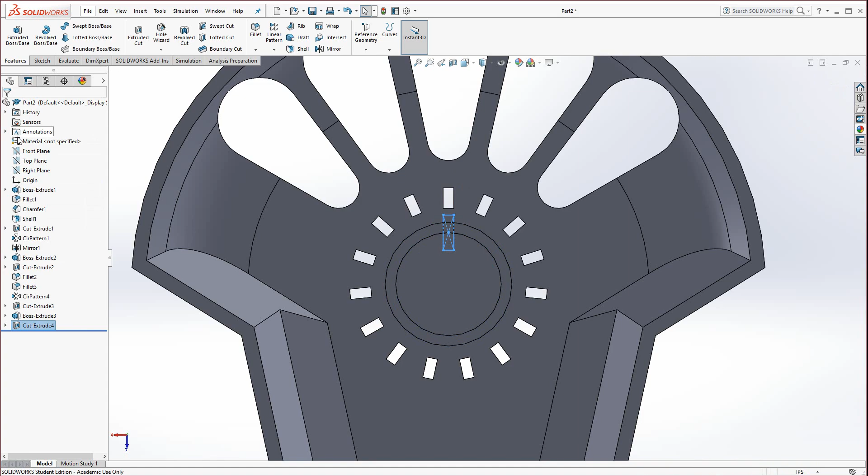Later, that's used as a little keyway.

Okay, now select this face and start a sketch, and let's draw the posts. There's 3, so you could draw one here and one here, and then we'll mirror the other one so we don't have as much work to do.

Let's just go ahead and draw a center line. Now I can select those 2, go to mirror entities, and now let's add our dimension. Actually, hit escape. Group select these, hold control, select all 3 circles, make them all equal, and now you could add a smart dimension.

And the diameter for the base, it's going to be 0.175, and then they get extruded a height of 0.375. So 0.175.

Oh, I forgot to add some more dimensions there. 0.175, and then they're spaced from each other 1.5.

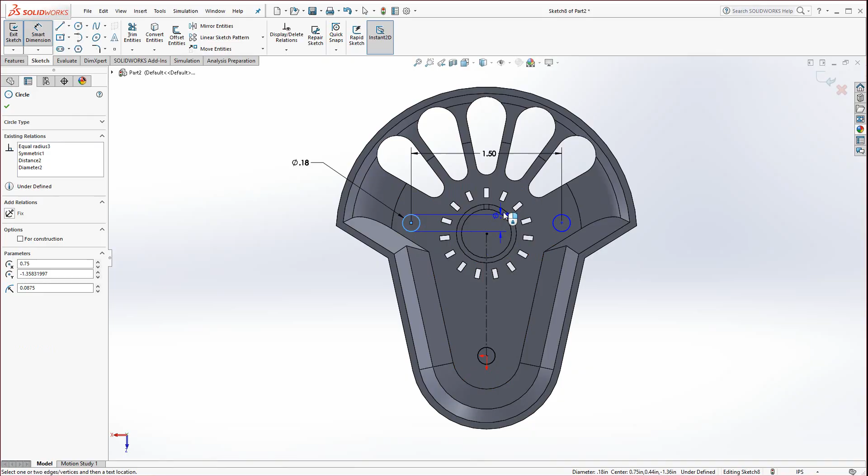And then dimension 1 to this arc and get right in here. There's a short little distance. Make sure you get this vertical dimension.

And that's 0.1. Okay, now you could go to Features, Extrude Boss Base, and add Draft. The draft on this is called out. Actually, I might not have called out the draft, so let's just put 1 degree.

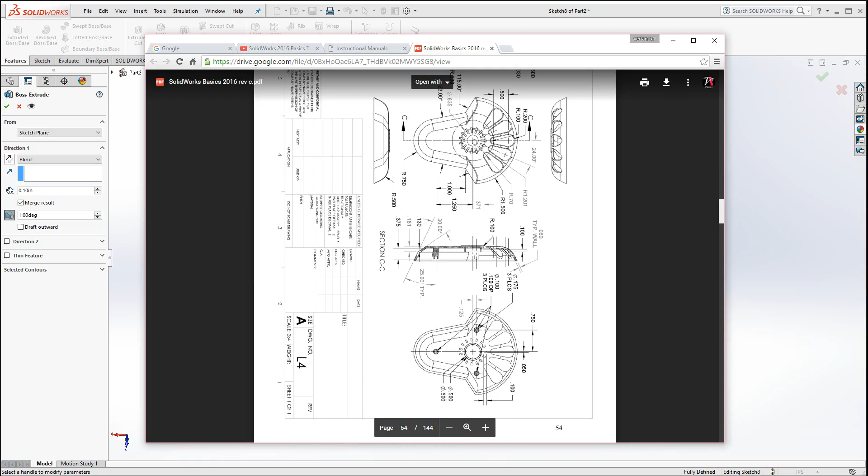And the height, I meant to take a look at that again. I forgot what that one was. That's 0.375.

and draw these little circles in here. Hit escape, drag a fence to surround them all, make them all equal, and then their point, hit escape on that one, they're 0.1,

and then they get cut. So extrude cut 0.1 deep.

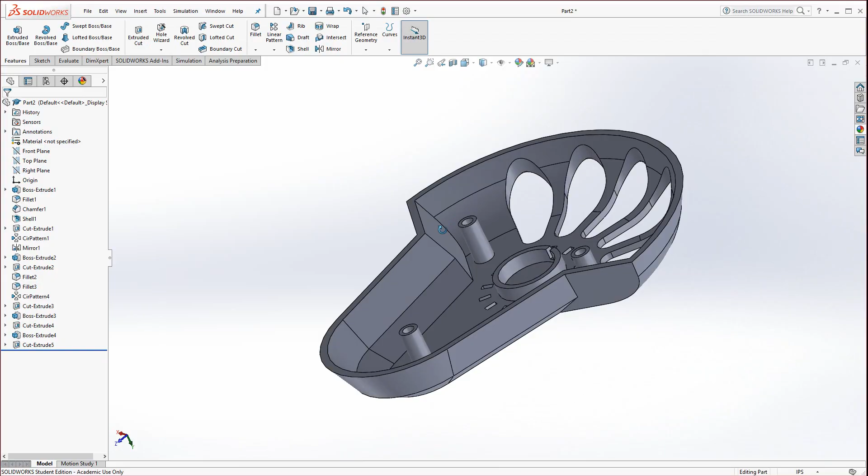Okay, now what's not on the print, that's pretty much it for the print. But what's not on the print are ribs, and so if you wanted to see this, feel free to watch it. You don't have to do these, but let's say you wanted to put in reinforcement ribs on here.

So we could, let's see, we'll put some in at the base here, and we'll have them at the base of this. We'll have them start here, start a sketch. You don't want them in the floor, because if you recall, you can't actually,

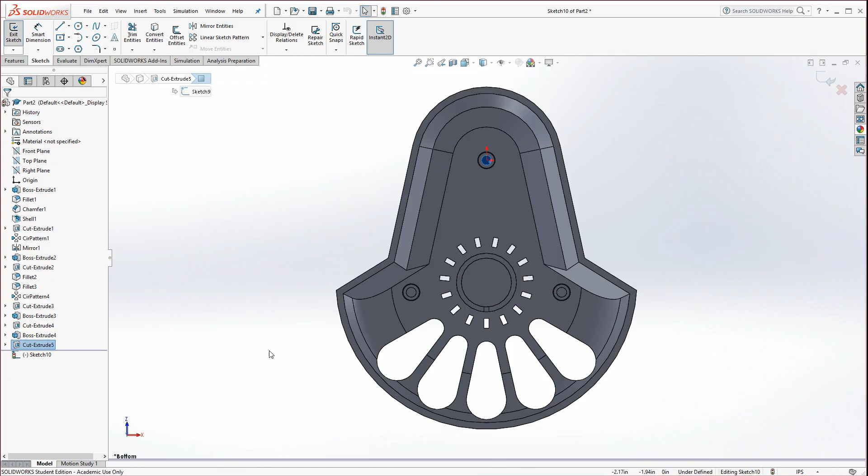oops, let's go to bottom. And I want that to rotate up, so Alt and the arrow keys. There we go.

So we could actually just draw little segments. I'm just clicking and then double click to end the chain. And notice they're just kind of in there. You just don't want them touching the edge.

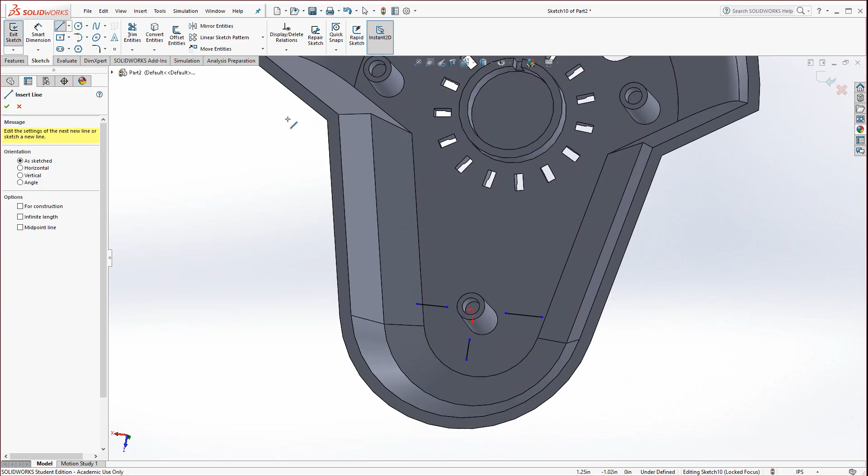Now we could put a couple up here too. I'm going to put one over on this side, and then one here. Make that perpendicular to this. And I'm not really locking into that, but that's okay.

Another trick you could do here is go with the center line and make those two collinear. That way we know it's centered. This one too, let's go with the center line.

Just from the center, drag that out. Make sure these are collinear. I'm just holding Control and selecting them.

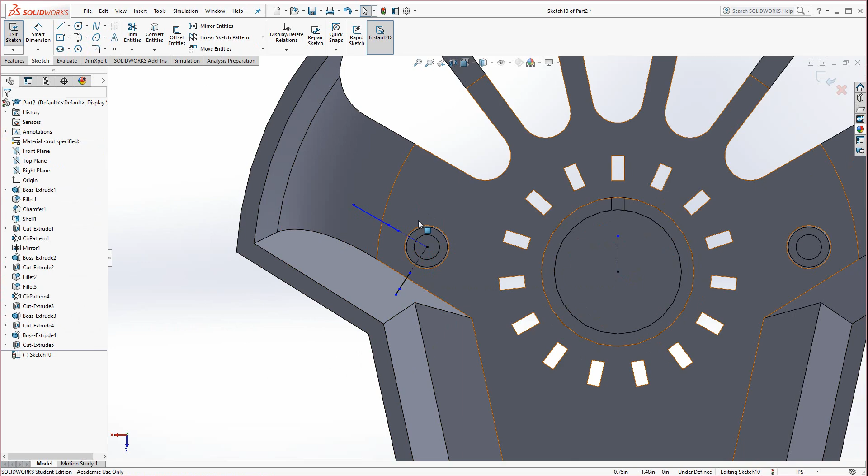Now we want to copy those over to the other side, so the center line is our best option here. Select the two line segments, holding Control, the center line, and then go to mirror entities, and they should mirror over to the other side.

Okay, now that we have those small line segments, notice they're not touching the walls. Be careful that you don't want them intersecting the walls. And now we could go to Features, Rib.

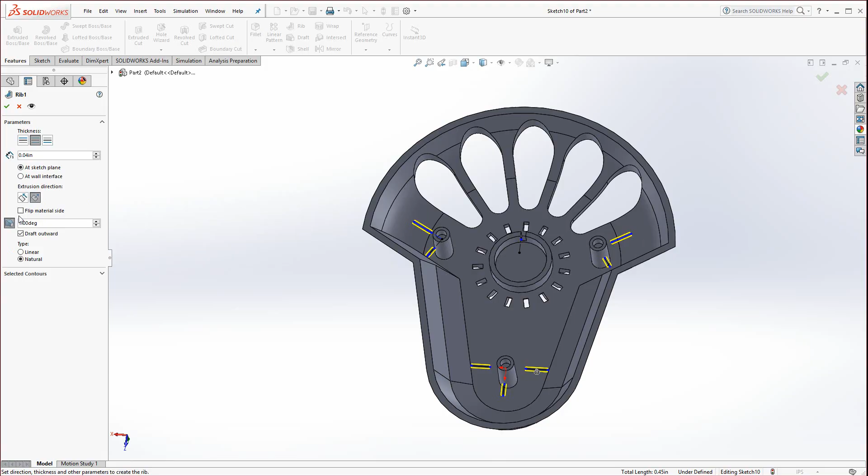And the rib thickness, since it's a 60 thousandths wall, we'll go with like 40 thousandths. And we'll add draft while it's extruding of 1 degree. Hit the green check. And now we have reinforcement ribs.